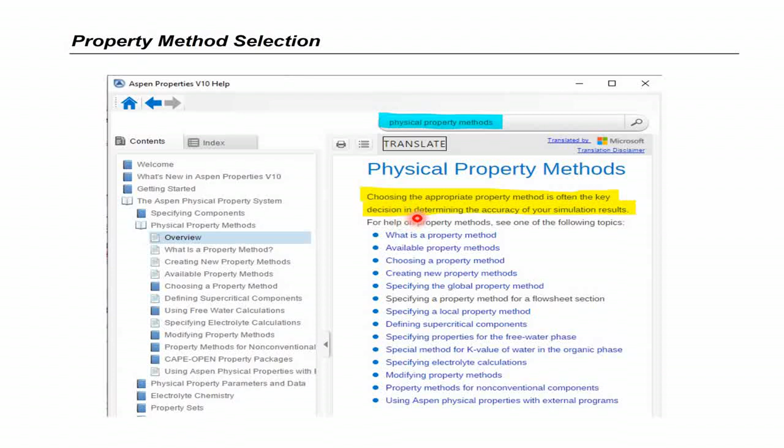Hello, in this new video we will study different procedures for doing the proper selection of the property method. If you look in the help system for physical property method, you will find this page with different items related to this topic. The first paragraph of this page will remind you of the critical importance of this selection. Choosing the appropriate property method is often the key decision in determining the accuracy of your simulation results.

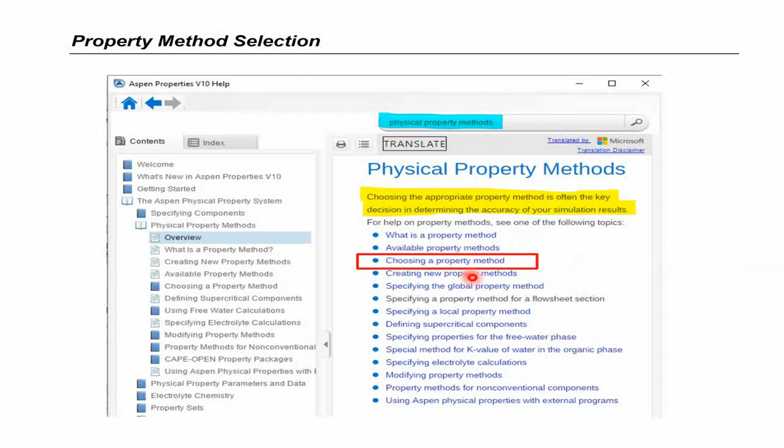We move now to the third item, choosing a property method. In this new help page, you will find two links that will help you in the selection of the property method. There is also a third one, which corresponds to an assistant, but this assistant is based on the guidelines, the second link, so we will not cover it.

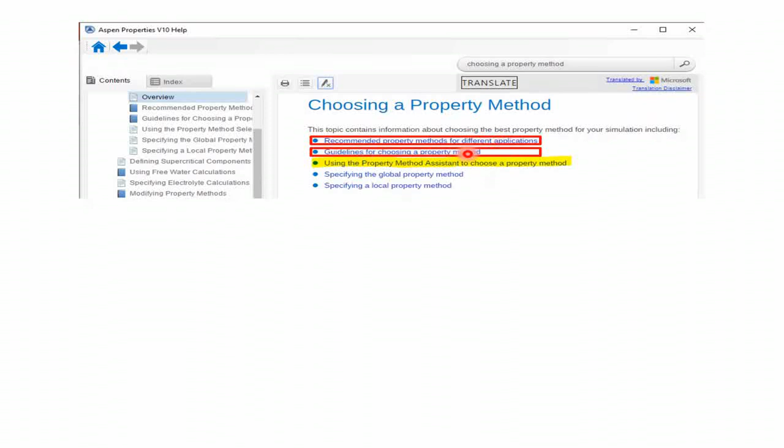If you click on the first one, recommended property methods for different applications, you go to a help page with different types of processes. In every one of these pages you will find different typical processes and the property method recommended for each of them. If you are lucky, maybe you will find your process in this list, and then you may be sure you have done the right selection.

If you click on the second link, Guidelines for choosing a property method, then the help system will show you a series of 3 different diagrams to help you with the selection. The first question you must answer corresponds to polarity. Are your components polar or non-polar? If they are non-polar, interactions between molecules are smaller and the simulation is easier.

The next question in this case, are you using only real components or also pseudo-components? Pseudo-components are non-real components that are used to simulate the performance of petroleum mixtures. If all your components are real, then you can choose between any of these suggested property methods. If you are also using pseudo-components, then you must consider if you are working under vacuum, where Braun or ideal methods may be chosen, or above atmospheric pressure. In this case, Chao-Seader, Grayson or Braun are good options.

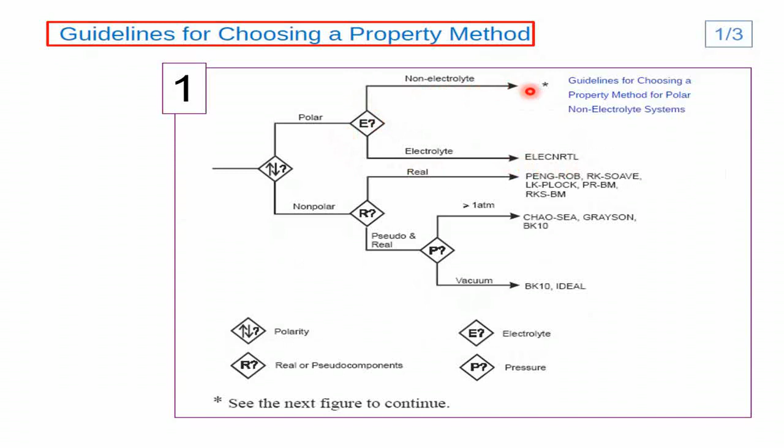When your simulation also contains polar compounds, then the interactions between them are stronger and the thermodynamic modeling is more complex. The first question in this case is, are electrolytes present in your system? If your mixture contains water and also compounds able to undergo ionic reactions, you must choose the property method electrolytes NRTL. If electrolytes are not present, then you must go to the second diagram. The second diagram corresponds then to systems with strong interactions in the liquid phase.

The first question concerns again pressure. For small pressures, under 10 bars, the interactions in the vapor phase are small, and this can be represented by the ideal model or a simple equation of state. Next question. Are there interaction parameters available? We must always answer yes to this question. Why? Because the availability of interaction parameters means that experimental values are available that have been used for obtaining these parameters, and the results will be much more reliable.

In the case, finally, that parameters are not present, then we should go back here and answer no. In this case, the property methods that will be proposed are predictive property methods, and so they are not as reliable as with available experimental parameters. These predictive property methods, which use group contribution, may be used for initial design steps, but not for final design purposes. The final question in this case is the presence or not of a liquid-liquid equilibrium. If liquid-liquid equilibrium is present, then the LLE modification of UNIFAC property method must be used. If not, these others can be used.

Let's go back now to the case that parameters are available. If interaction parameters are available, then we must question again about the existence of liquid-liquid equilibrium. If liquid-liquid equilibrium is present, we can only use NRTL, UNIQUAC and their variants in combination with equations of state. If liquid-liquid is not present, then we can use these models and also the Wilson model. This restriction corresponds to the fact that the Wilson model, although it usually shows good performance, is not able to represent liquid-liquid equilibrium. All these 4 sets of models correspond to activity coefficient models.

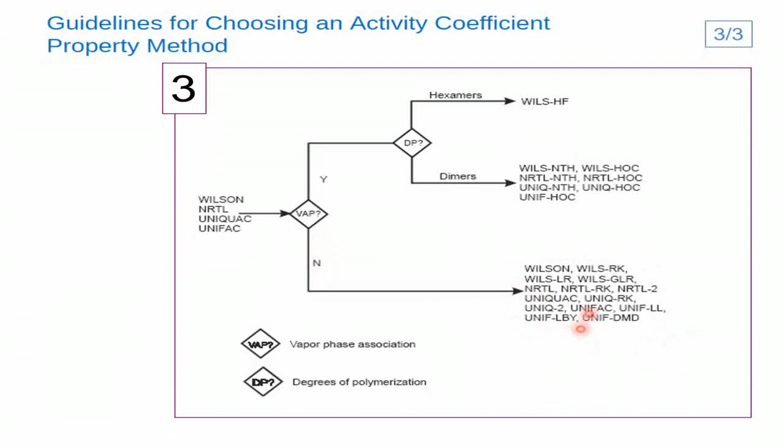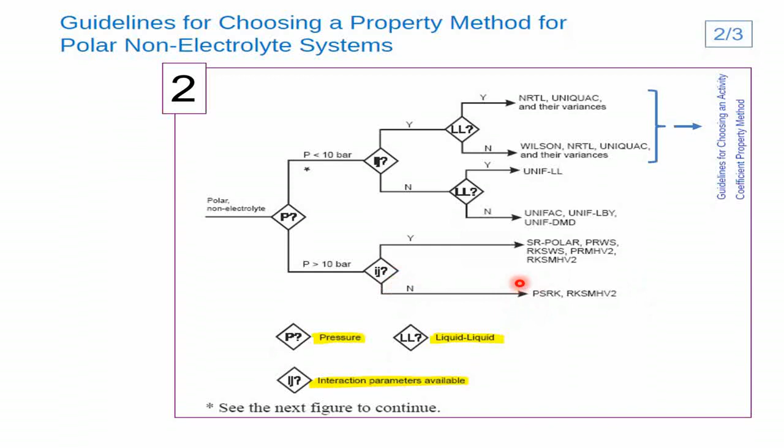Let's go back now to the second diagram. Finally, in the case of complex liquid phase with strong interactions, polar molecules, and high pressures, complex vapor phase with strong interactions, we must select one of the most powerful property methods available in Aspen. If interaction parameters, that is experimental values, are available, then this upper group must be the option, and if they are not available, we must choose the second group, which uses predictive activity coefficient models for estimating the interactions.

Once you have completed the selection of the property models in these diagrams, and you have chosen the group of property models which are suitable for your simulation, you must read information about them in the help system of Aspen. Here you can find, as an example, information about the Peng-Robinson property method. This information is very concise. I will highlight now some important characteristics.

For example, that the method is recommended for gas processing and refinery, that you must use binary parameters when applying this method. You must check for them. You are informed about where you can find these parameters in the software. Here you have information about the type of alpha function and mixing rules that are used by default in the Peng-Robinson property method. In the mixture types, the characteristics: it can be used for non-polar or mildly polar mixtures. And other recommendations about pressures, temperatures, and so on.

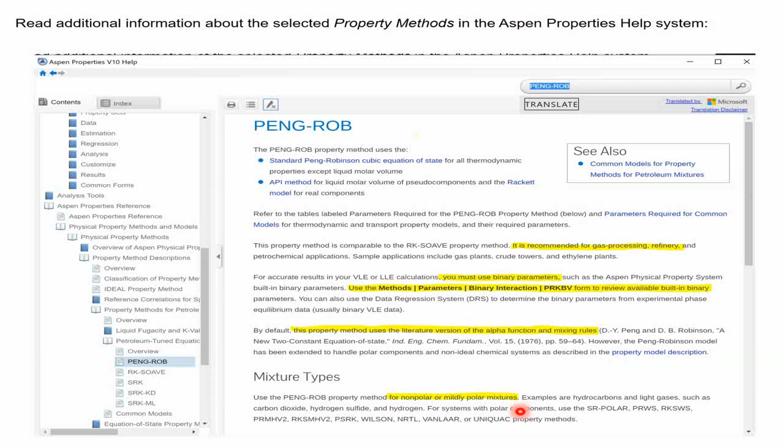We will present now a practical case. We are going to choose the property model for the separation of a mixture of acetone and water in an atmospheric distillation column. We start with the first diagram. The first question: is it polar? Of course. Water is a highly polar compound, so we go to the upper branch. Do we have electrolytes? We have a system with water, but acetone does not form ions when dissolved into water, so we go to the second diagram.

First question: operating pressure? We are using an atmospheric column, so upper branch again. Are there available interaction parameters? We answer yes. It is expected that experimental values for the vapor-liquid equilibrium of acetone and water are available. The next question: liquid-liquid equilibrium? Acetone and water are completely miscible in the liquid phase, so the answer is no. Then Wilson, NRTL, UNIQUAC, and other variants must be selected.

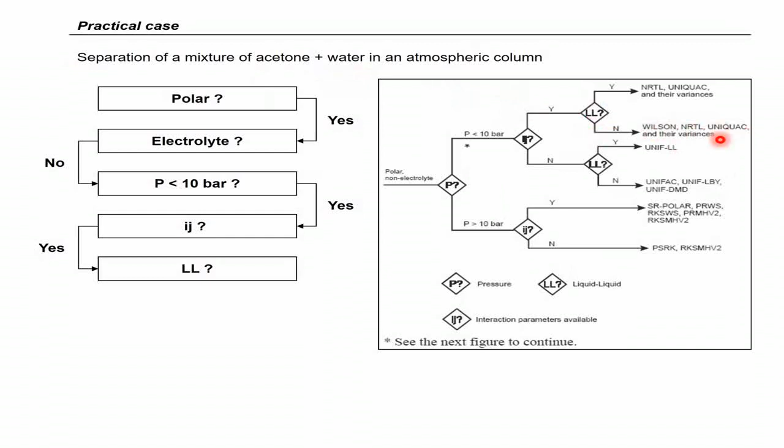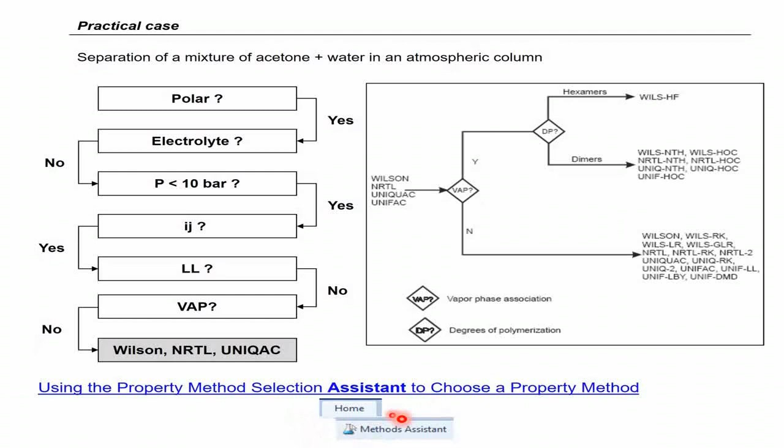Finally, in the third diagram, we check for vapor phase association. We do not have hydrogen fluoride. We do not have organic acids, so this is the final set of activity coefficient models we must use. Finally, if you want to use the assistant provided by Aspen, you must go to the ribbon and in the home group select Methods Assistant. But as you can check when you use it, this Methods Assistant is using the diagrams we have presented before.

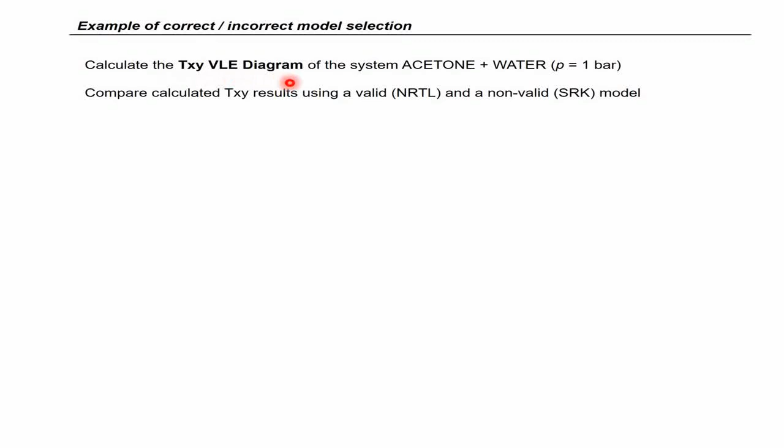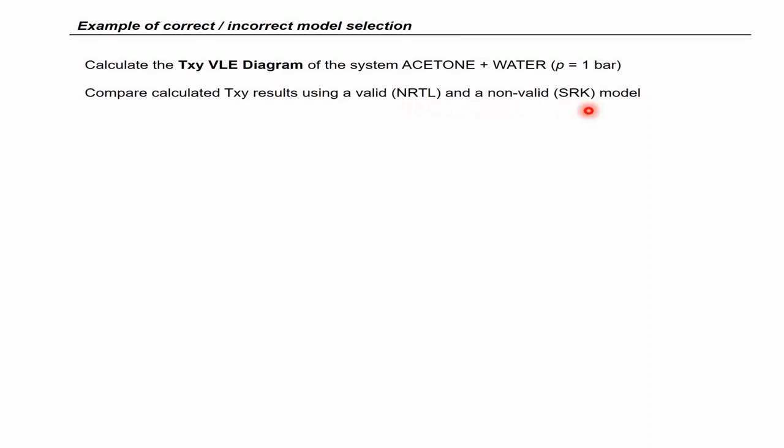Finally, I will show you an example of the performance corresponding to the selection of a correct and an incorrect property model. For this purpose, we are going to calculate the vapor-liquid equilibrium diagram of the system acetone-water at 1 bar. We are going to compare the results using the NRTL model, which as you can check is a valid model, and the Soave-Redlich-Kwong equation of state, which is not able to model this system. We start an Aspen Properties run. We select the template, general with metric units. We define the components, acetone and water.

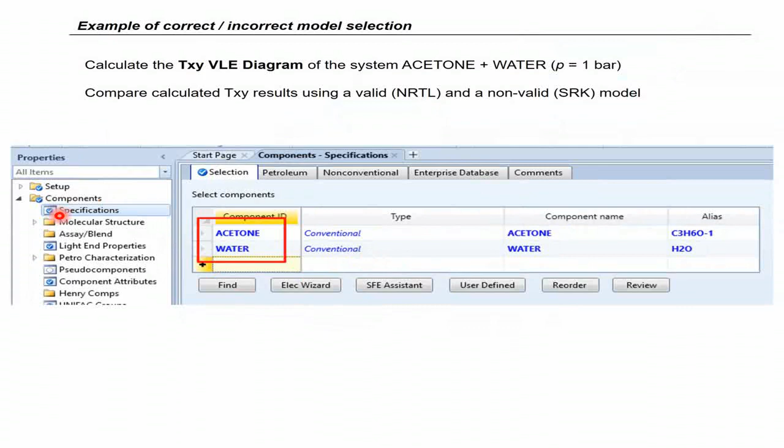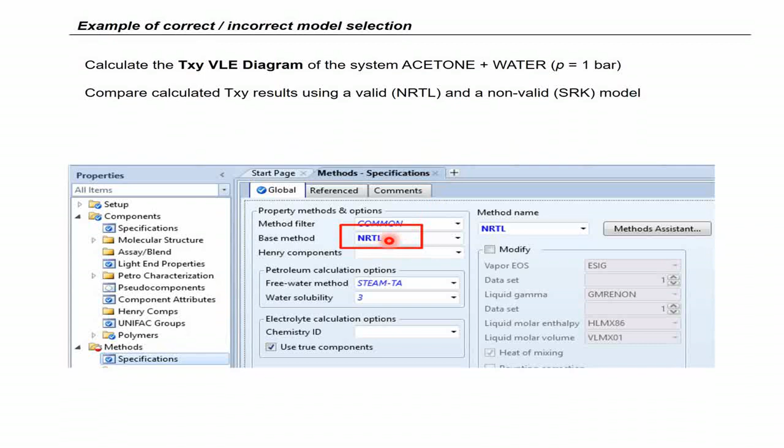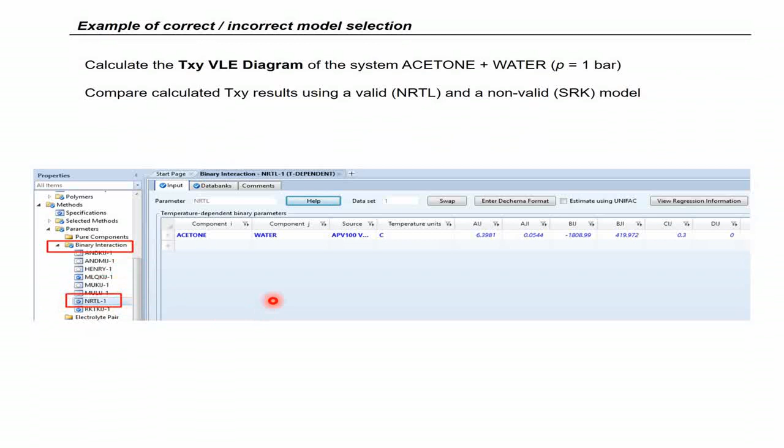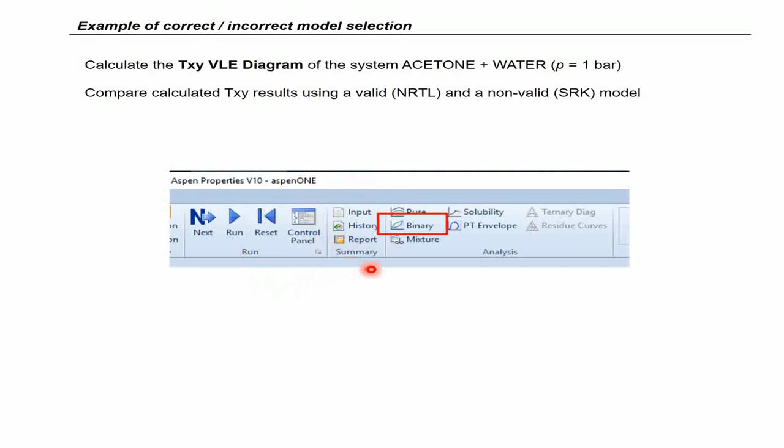Next, we go to the methods folder and specify the base method, NRTL in the first case and Soave-Redlich-Kwong in the second. Next, the software will force you to check the availability of parameters in the binary interaction NRTL folder. As you can see, there are parameters available for the pair acetone-water. And now you can go to the ribbon at the top of the screen and select Binary in the analysis group. Once you complete the values, you will obtain the diagram calculated with the NRTL model.

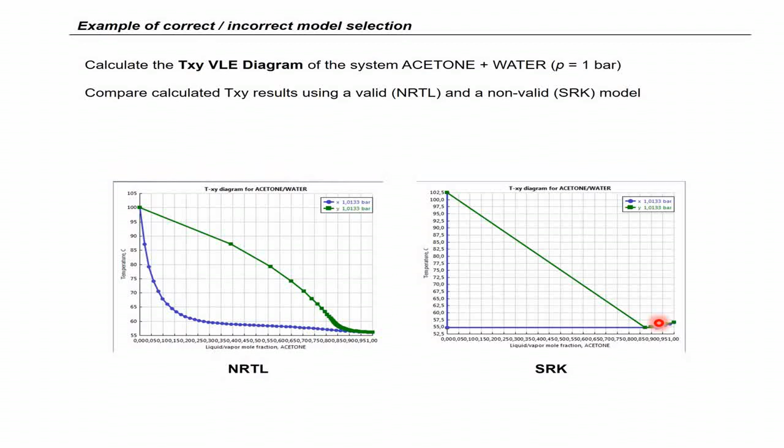This diagram agrees with experimental values, and then the diagram represented by Soave-Redlich-Kwong. As you can see in this case, the model predicts the existence of a liquid-liquid heteroazeotrope, and the behavior corresponding to this system is far from reality and does not agree with experimental values.